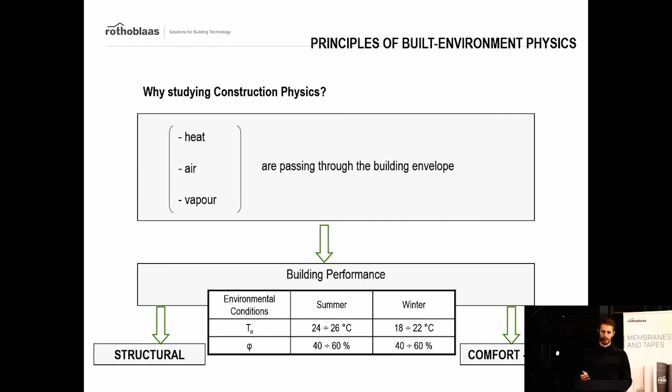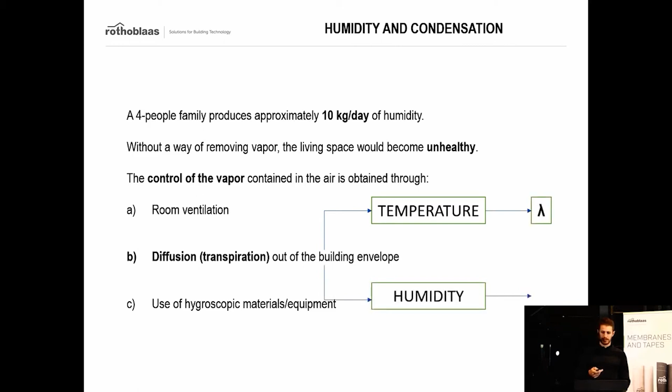So it is very important to design properly the wall buildup or the roof buildup, so that we don't have structural issues of our timber structure, which especially with a timber structure is very important to avoid, and of course to make sure that the inhabitants of the buildings are living in comfort. So again, temperature and humidity, I highlighted it again because it's the most important thing.

So how does it work exactly? I told you that the wall is breathing. So basically we have on the inside a bigger amount of vapor and a higher pressure as well. So this vapor tends to migrate, tends to pass through our wall buildup. And as I told you before, there's another thing to keep in mind.

Passing through the wall buildup it is going to encounter zones with different temperature, and we just explained before that when the vapor contained in the air reaches a certain temperature, which is about 13 degrees usually, it can condensate. So we don't want our vapor to condensate, neither on the surface nor on the inside of our wall, for example.

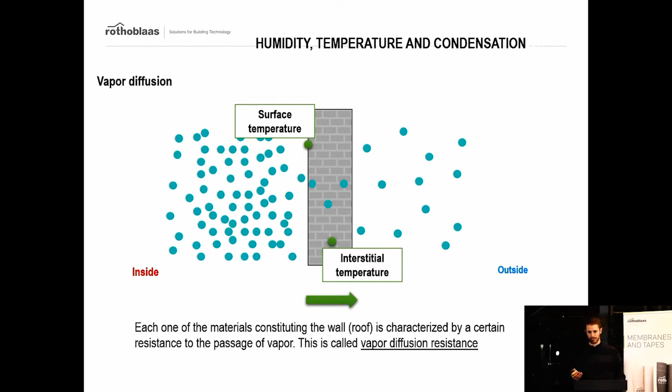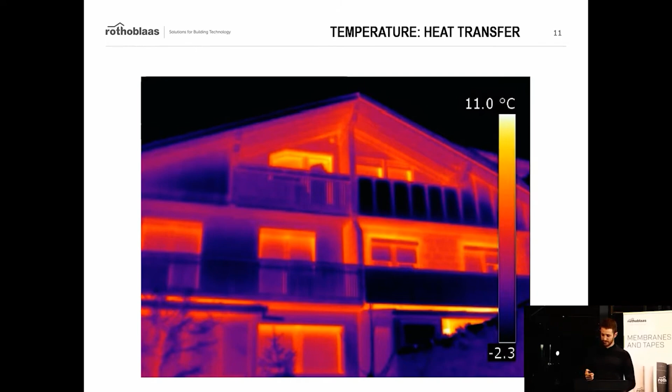So the temperature is very important, as I told you before, and this is a picture done with a thermal camera, and as you can see, the parts of our building are not always the same temperature. We have places like around the windows, or when we have cold bridges, where the temperature is dropping down in some parts of our structure, and this is very bad because it can cause condensation, because we always have vapor inside, and if the temperature is dropping down, it can be very dangerous.

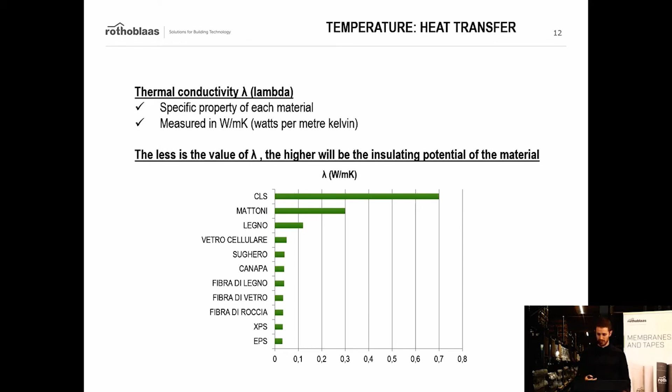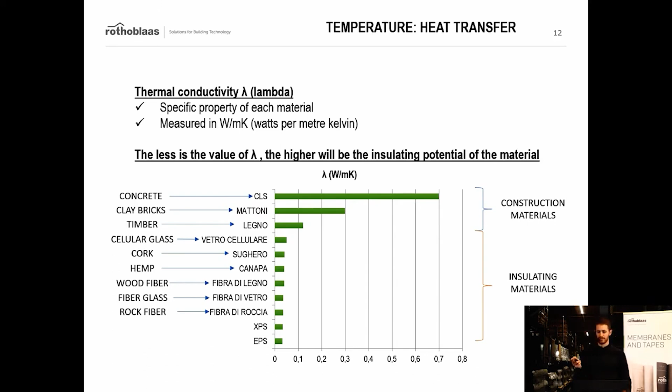So it's very important to talk about the thermal conductivity, which is this lambda here that we are seeing. Different materials have different thermal conductivities. In timber structures, we are lucky in a sense because timber has a very low conductivity, and therefore it helps the insulation of the structure itself. And we can see here in the graphic some other very common construction materials, and concrete or clay bricks, for instance, have a higher thermal conductivity.

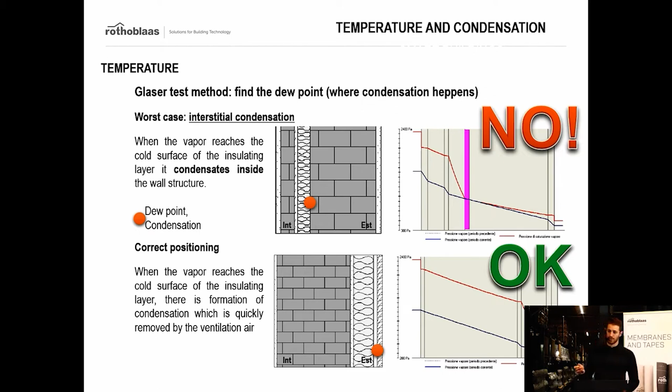One of them is the vapor content, and the other one is the temperature. And if the two lines are colliding, like in the first case scenario, we really have an issue of condensation. In this case scenario, we have interstitial condensation. If the two lines are apart, then it's not a problem. So the Glaser test worked, and we are sure, let's say, that condensation is not happening inside our wall.

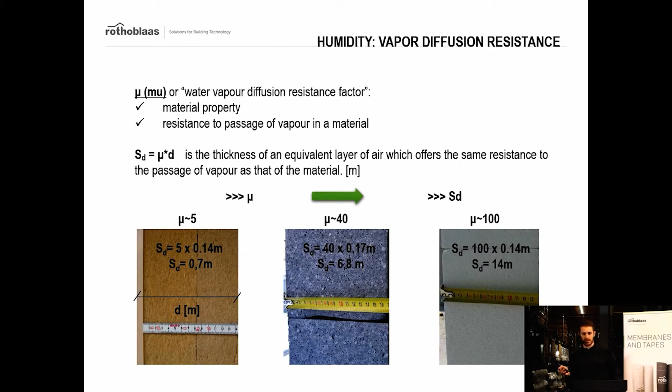Another very important thing about material is the SD, and the SD is an indicator of the resistance that a certain material is offering to the passage of the vapor. So we're gonna see again the SD when we talk about membranes, because it's very important to study the SD when you're choosing the right membrane. The SD is measured in meters because it's the thickness of an equivalent layer of air which offers the same resistance to the passage of vapor as that of the material. So that's why it's in meters.

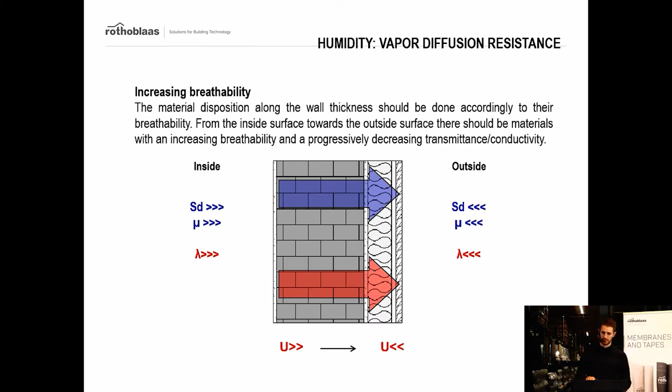And so inside our wall thickness, it is very important to have vapor control layers on the inside, and it's very important at the same time to have materials with very low thermal conductivity on the outside. So insulation material on the outside, so that our wall remains warm and there isn't too much vapor passing through. And if we try to keep these two things together, we are sure that we won't have condensation.

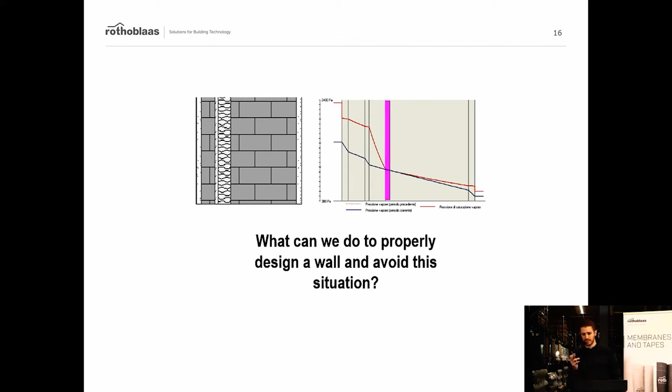But what do we do in the case that, for instance, we have a buildup which is in this situation? So when we study it and we see that there might be some interstitial condensation, we are going to use membranes, of course. All the membranes have water tightness. So that's a common characteristic of all the membranes. And another characteristic that all the membranes have is the wind tightness. So all of them can be used for wind tightness and air tightness as well. What changes is what we just explained. So the SD, the resistance to the vapor passage

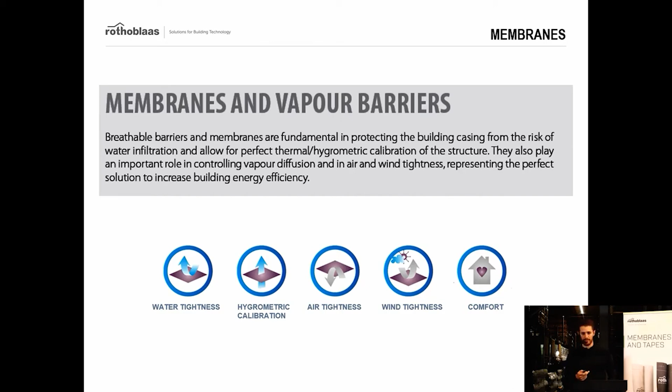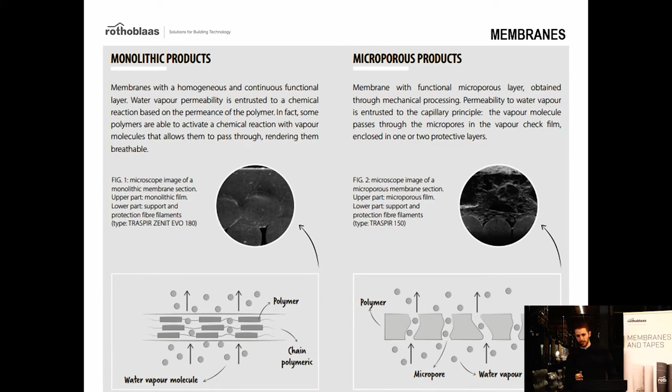through the membrane. There is another main difference in membranes. We have membranes which are monolithic and other membranes which are microporous. What is the difference? In the monolithic membranes, the vapor can pass through with a chemical reaction. As you can see in the image, all the molecules are in contact with each other, so it's a unique layer, let's say. In the microporous products, the molecules are arranged so that there are some very, very small gaps between one molecule and the other. They're not holes, of course, because they are still waterproof. But the vapor can pass through by capillarity, throughout these small gaps that are formed.

Another very important thing when you're choosing the right membrane, because there are a lot of membranes out there, is the tensile strength. I'll give you another example. When you're on an inclined pitch of a roof, the installer is stepping onto the membrane with his feet, and there are maybe some nails to keep the membrane in place. It's possible that the membrane tends to tear apart. So when you're placing a membrane onto an inclined roof pitch, it's important to choose a membrane that has a very good tensile resistance, to prevent the tearing.

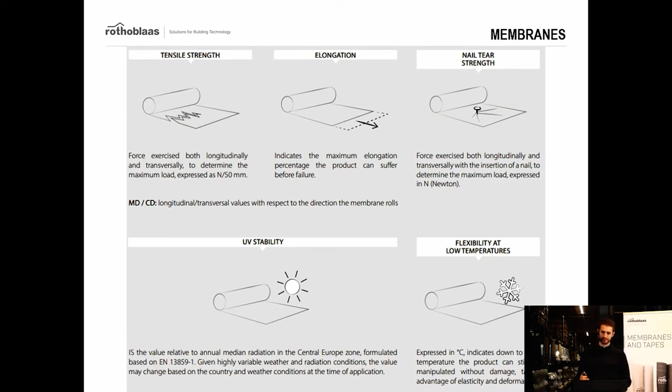Another very important thing is the UV stability. Of course a lot of membranes are inside the build-up of the wall. But when you're on site and you leave the membrane to protect your timber building, sometimes the on-site works can stop for months, sometimes even more. So you have to make sure that you prevent this, so you don't leave your membrane outside for too long.